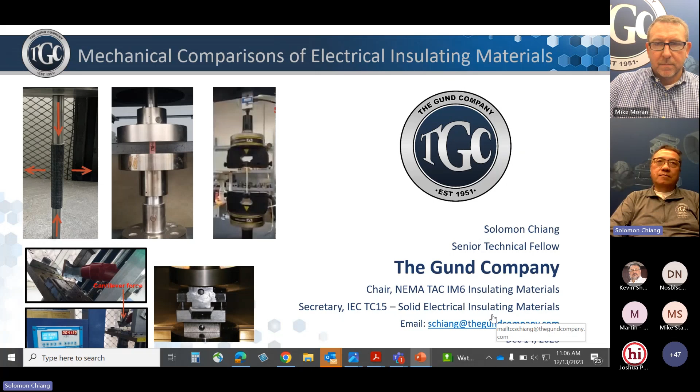Comparisons of electrical insulating material properties. So why do we want to compare material properties? There are many good reasons, and the first one is material alternative.

In the last two or three years, we always run into material supply chain issues. From time to time, the purchasing department would say that they cannot get material A in time, or either the lead time is too long or the material is no longer available. So they want to substitute material B with the incumbent material A. Obviously, we want to make sure that this would not affect our product or components.

Sometimes purchasing comes to us and says that for purchase productivity or cost reduction, they want us to look at this material, so we will do the same thing. Sometimes the customer wants to, or we ourselves want to improve the properties of certain components. So again, we would need to compare the properties of the incumbent material to the candidate material we want to replace it with or add as an alternative.

So those are all good reasons for comparing material properties. In order for us to compare material properties, we obviously need to know the material standard and the test standard and the relationship. Besides looking at a single number, we also like to look at what we call the graphical test data, the stress to strain curve. I will elaborate on this later on, but this is essentially the behavior of the material under stress, and that's very important for mechanical properties.

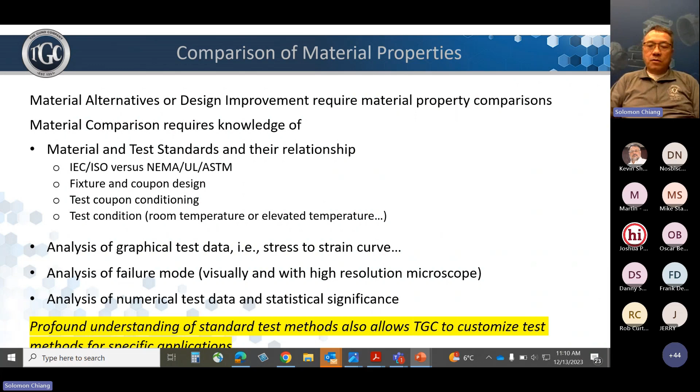On top of that, after we have compared the material properties, we may want to use the candidate material and make some actual components or even finished product. At that point, we are talking about application testing, testing incumbent design versus candidate design, and we need special test methods. Without a good understanding of the material and test standards of the material, we would not be able to come up with a test method that's valid and meaningful. So those are all the reasons why we want to compare material properties.

This webinar will be focused on mechanical properties of electrical insulating materials. The reason why is because mechanical properties for electrical insulation is as important as the electrical properties of the insulation, and sometimes even more important. And it plays a very important role in successful product design, safety, performance, and reliability.

These are the three takeaways I hope we can take with this webinar: to have a better understanding of mechanical test standards for electrical insulating materials and how to avoid improper comparison. We want to compare apple to apple, not apple to orange, to get the results or the conclusion that we need. After that, we want to learn how to customize a non-standard test method. Non-standard test method is what I talk about, application testing, that is specific to the product or the application.

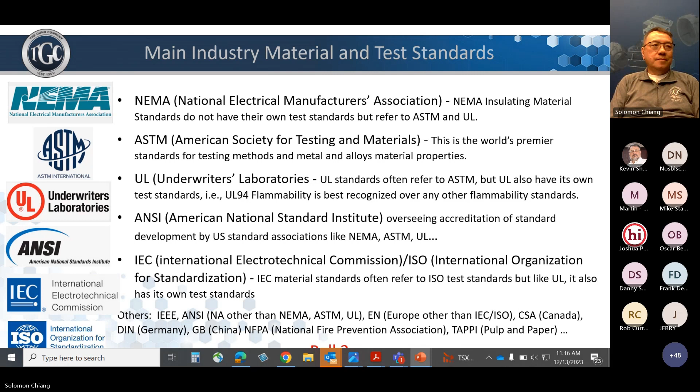Background. You can select more than one standard on that poll, I believe. Oh, no, you can't.

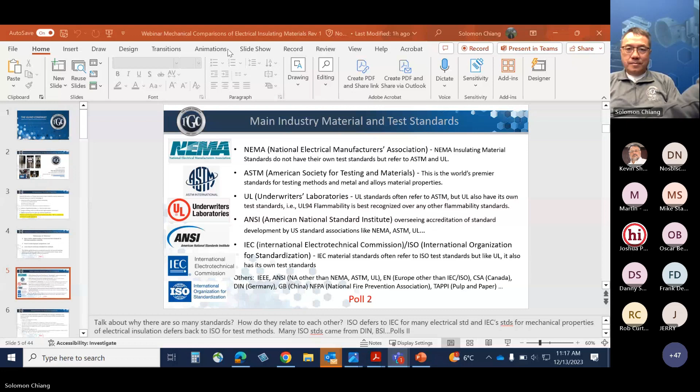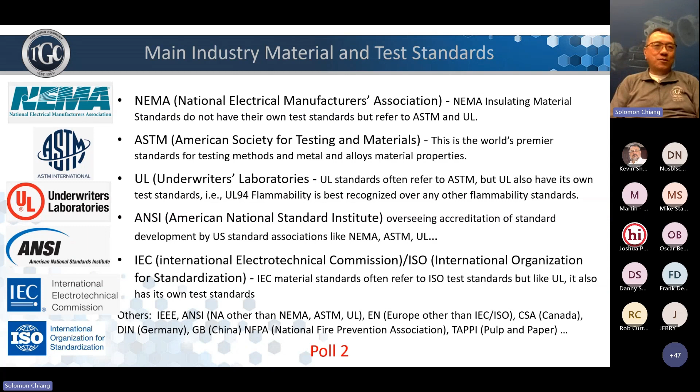It's gone? Okay. Thank you. Okay, thank you, Josh. Looks cleaner now.

So looks like many of us, especially UL, we all know about UL and NEMA. Yes, as expected, IEC is and ISO, because the audience obviously is North American based, but there are enough of us who work with international standards. That's a good thing, because I'm going to talk about the difference between IEC and NEMA standard a bit later.

So these are the requirements for a good test method or good test standard. Essentially, a good test method, and I would say ASTM is very good at all this.

The standard test method must provide meaningful results for use and be repeatable intra-laboratory and inter-laboratory. That means if you have the same set of samples and test it 2 or 3 times, it should provide consistency, the same result within a couple of percent by the same laboratory. And if you send that material to a different lab, if they follow a good test method, the result should be similar, again within a few percent. Actually, ASTM tells you the inter and intra-laboratory uncertainty for each test method. That's why I said ASTM is a very good test method.

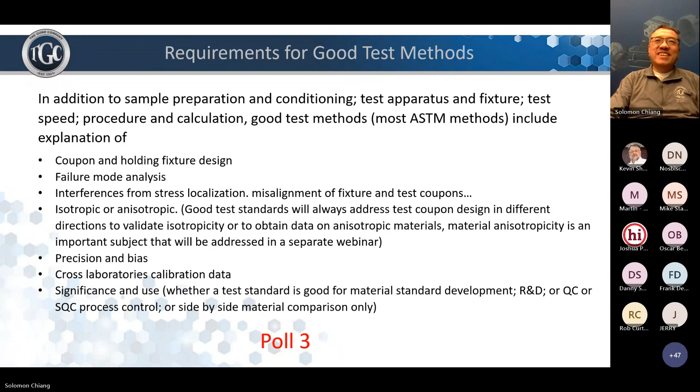Okay. Great news, I'm talking to experts, so I better be careful. So most of you, obviously, based on the response, have seen it.

This is the NEMA LI1 or IM 60,000, section 22, and that's the NEMA G11, and that's the performance requirement table. That's a very important table. First, it'll tell you what is the test standard, and then it'll tell you what conditions the test coupon has been exposed to. For high temp material, which is G11, a high temp glass epoxy grade, it will tell you what's expected at what they call elevated temperature property - that's to test at 150 degrees. It also shows you the properties for different material thickness. As you can see, some properties are thickness dependent, some are not, but NEMA shows it all in one table.

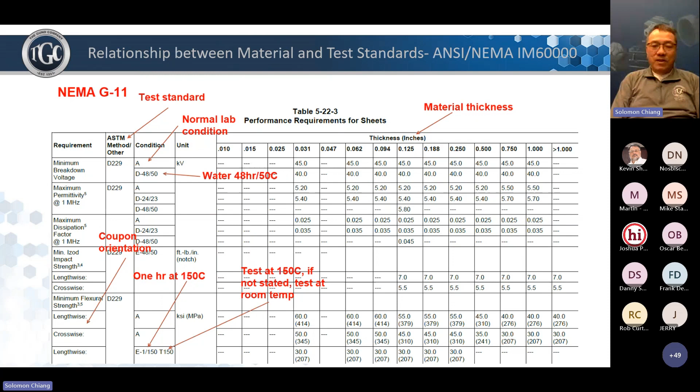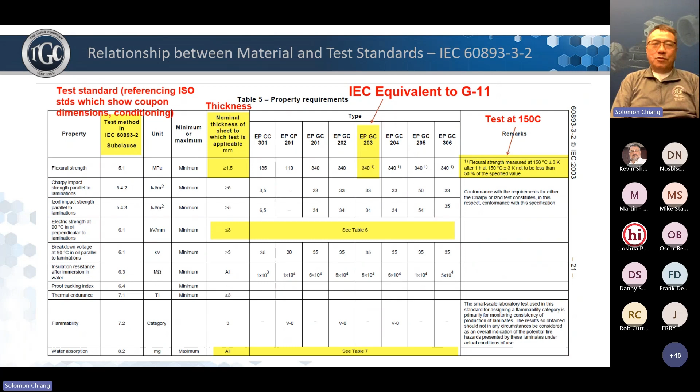So this is essentially a quick comparison between the NEMA standard and the IEC standard on material properties. I know I'm a bit biased, but I think the NEMA one is easier to understand, whereas with IEC you have to flip back and forth through different documents.

One thing we did with NEMA IM 60,000 is provide SI units on all the properties. And we went through an exercise and actually compared the NEMA properties to IEC properties. As far as the actual value is concerned, they are within a couple of percentage points, so they are in agreement, and most of them can be converted readily. Not all of them though - like water absorption, NEMA and IEC use different philosophies on how they want to express water absorption. The same goes for impact.

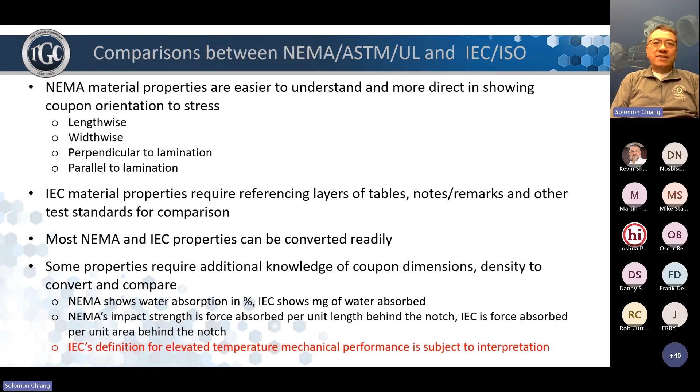The one beef that we have is the IEC definition for elevated temperature mechanical properties. As you can see here, with NEMA it's very clear - at room temperature it's 60,000 psi, and at elevated temperature it's 30,000, so roughly half. That's what IEC said too, but IEC put it in the remarks, and sometimes people can construe that instead of it being half of the requirement at room temperature, it should be half of the actual test value at room temperature. So material that outperforms at room temperature would end up having a higher bar to meet at elevated temperature.

For example, IEC EPGC 203 is 340 MPa at room temperature, so that means 170 at elevated temperature. But if your material tests out at 600 MPa at room temperature, some people may argue that it has to be at least 300 MPa at elevated temperature. That is not the intent of IEC.

The Gund Company actually holds a plenary meeting of IEC TC15, which is responsible for all this, and we talk about this at the next revision. We will add one more sentence to the remark, saying, for example, 340 at room temperature means 170 at elevated temperature. Examples like that clear up a lot of discussion or argument between purchaser and producer.

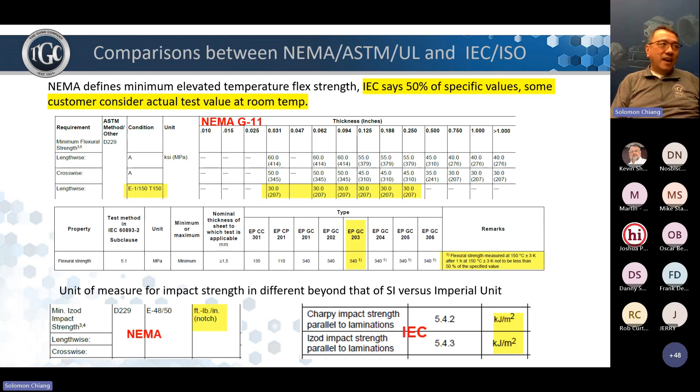Now, there are 5 main mechanical properties we will discuss in this webinar, and they are in this order. The reason why they are in this order is that 1, 2, and 3 are almost a requirement in the majority of the NEMA and IEC material standards.

Tensile is usually listed as a typical value, and shear again as a typical value. NEMA only lists punch shear. IEC lists both parallel shear, or ILSS, and punch shear as typical values.

For those of you who attended a previous seminar on electrical insulating material properties, we talked about the difference between requirements and typical values. In order for a material to be recognized as a NEMA grade or IEC grade, it must meet the requirement. All the properties must meet the requirement. A property that has a requirement is always shown as minimum or maximum, so you need to exceed the minimum or you cannot go beyond the maximum. Those are requirements — you must, or else it cannot be recognized as a NEMA or IEC grade.

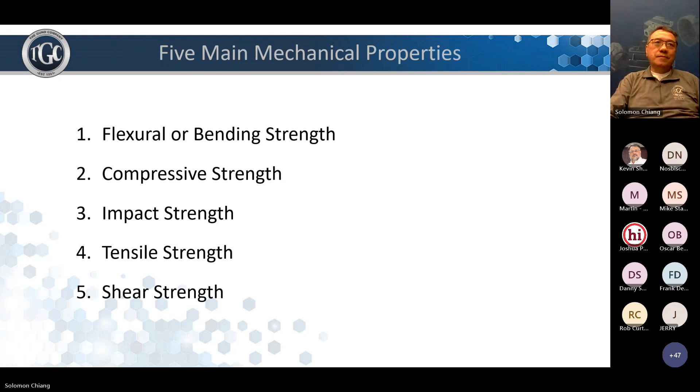Before we move on to talk about those 5 properties, I'd like to talk about universal testing machines. Based on the response, most of you are familiar with universal testing machines. They are universal because they can test everything I talked about before, except impact, plus a lot more. But they are universal in what they can test — they are not universal in the range. And as we all know, for insulating material, the mechanical property can vary by orders of magnitude.

Thin gauge material, flexible material — they are obviously not as strong as thermoset laminate. And heavier raw material is stronger than thin raw material. So at the Gund Company, we have universal testers as low as 1 to 1,000 pound maximum. Those are the ones we use for flexible materials, some thermoplastics, and paper.

Most composite material can be tested with a 20,000 pound, or 10-ton, universal tester. But when you get into heavy wall stuff, 1 inch wall and above, then obviously you need more poundage, or tonnage, like a 120,000 pound or 60-ton machine, in order to perform the testing to failure.

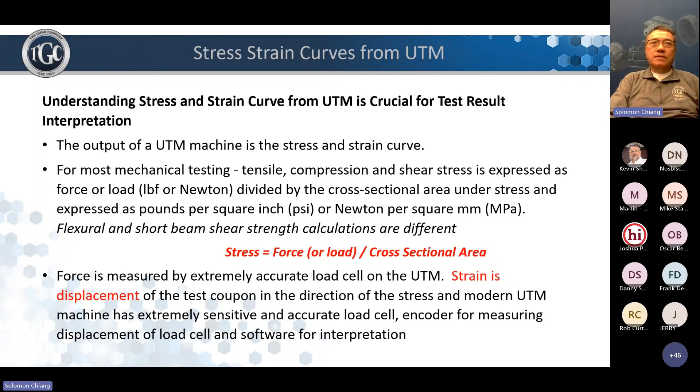This is a typical stress-to-strain curve obtained from a universal testing machine. This is a ductile material, probably copper or brass. As you can see, initially there's an elastic deformation region. This is linear, and also, once you let go of the stress, the material will go back to its original dimension. So this is the elastic deformation zone.

But it doesn't last forever. Once you exceed the yield point, the material starts to elongate without much increase in stress. It will strain harden, neck, and then fail, crack, or break apart into two pieces. The moment a fracture or failure occurs, there's a drastic drop in the stress or load, and the universal testing machine will stop right there. That's one very important parameter we can get from a UTM.

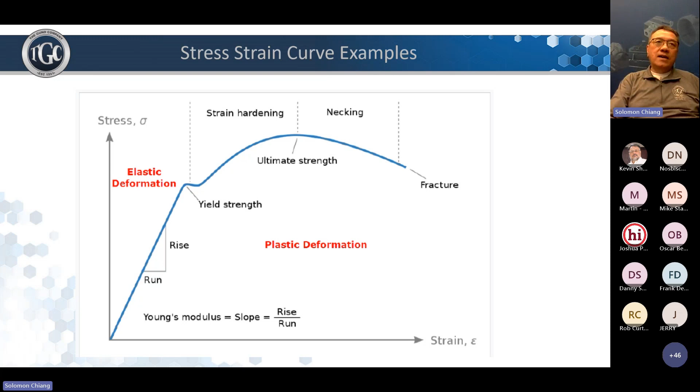It's the linear zone where the slope — essentially rise over run — is what we call the Young's modulus. Why is the Young's modulus important? Nowadays we all do finite analysis, and the Young's modulus is one number the finite analysis requires. Most of us are familiar that the Young's modulus is usually a very large number, like a GPa or Msi, and the reason is that it's divided by elongation, which is a small fraction.

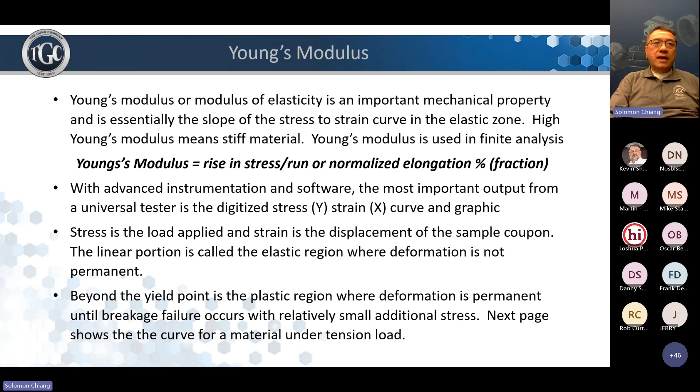The rest of them just repeat what I said about the elastic zone and plastic zone.

Now that we've learned about the universal test machine, we'd like to go into the 5 properties. The first one is flex, or bending, property testing. Flex is very important for both comparison and design.

If you have two material substitutions, if you do the flex test of material and compare A to B under the same condition, you already know a lot. The flex data can also be used in design work, like the finite element analysis we talked about.

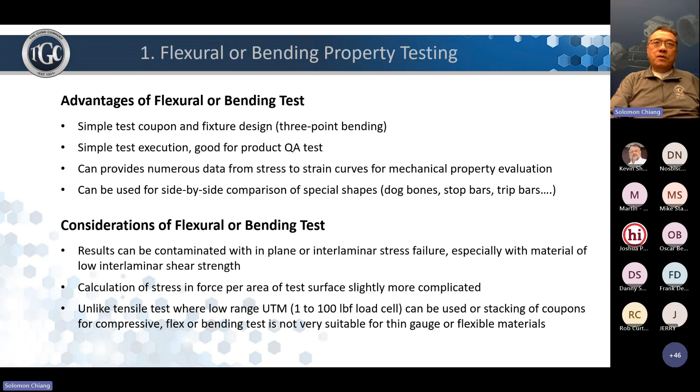Flex seems simple, but in order to do it correctly and get the right number and arrive at the right conclusion, there are certain things we need to watch out for.

The flex test is essentially a 3-point bend, sometimes called a 3-point bending test. The coupon or specimen is supported on both ends, and we apply a force in the middle.

This explains what happens when you press it down. At the bottom, there's tension - the material is being stretched. At the top, the material is being compressed. Ideally, in the middle, nothing happens because the material neither elongates nor is compressed.

The reason it doesn't count is because we don't have adequate span distance. ASTM and ISO call for a 16:1 span distance - 16 is the distance between the two blocks, and the 1 is the material thickness. If it's less than that, you could run into ILSS failure.

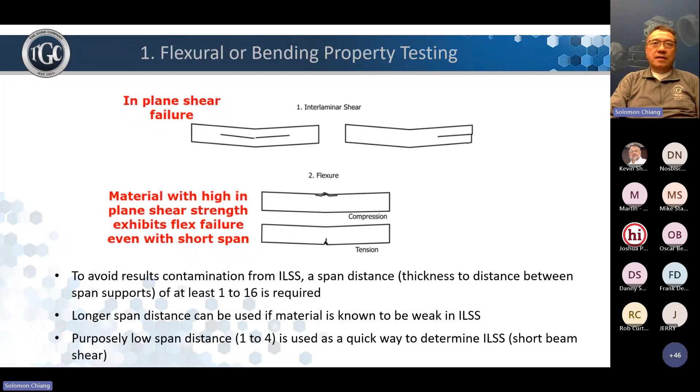For material with weak ILSS, sometimes you need to increase the span distance beyond 16:1 to get proper flex failure data. On a UTM, the flex test stress-to-strain curve would look like that.

For brittle material, because it fails at a distinct point, the universal testing machine (UTM) will pick up a fail point. For ductile material, because it doesn't fail the same way, ISO or IEC say to stop testing at 3.5% elongation, and ASTM says stop at 5%. In that zone, it really doesn't make a lot of difference whether it's 3.5% to 5%. Essentially, they just want a standard point to stop the testing.

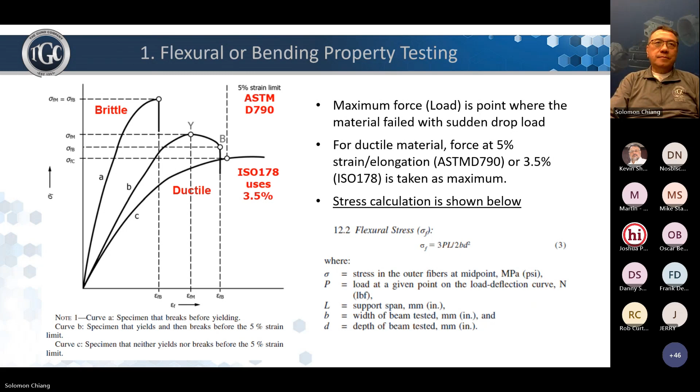The second important property is compressive strength. That's again very useful to compare material A to material B, and also useful for design work.

A ductile material, if you compress it, actually expands a little bit and looks like a barrel. There's a Poisson ratio that describes the displacement in the y direction relative to the compression in the x direction, but we won't cover that in this webinar. That is a very important number for finite element analysis also.

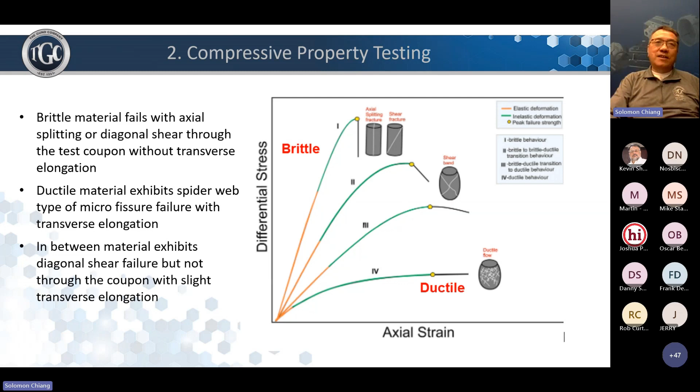The failure mode is not a vertical crack or diagonal crack - it's a lot of minute failures. So just by looking at the coupon after it failed, you can tell whether it's a ductile or brittle material.

This is a picture of how we conduct compressive testing. Again, very simple - as long as you follow the rules, the sample should be a prism, 1/2 inch by 1/2 inch by 1 inch in length. For tubes and rods, just follow the rule.

Again, when you compare the properties of material A to material B and it shows some compression difference, you have to make sure the properties were performed using the appropriate ASTM, IEC, or ISO method, so there's an apple-to-apple comparison.

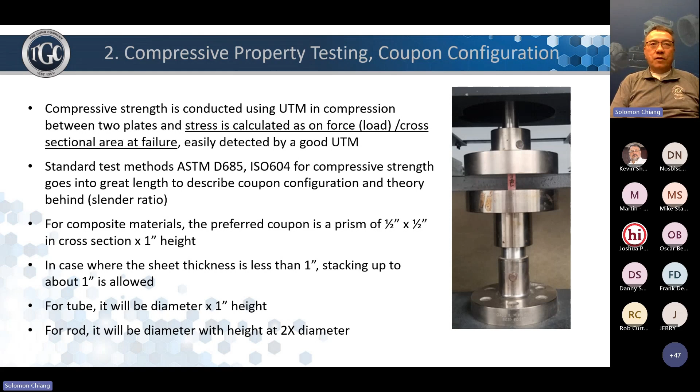Even though it looks simple, both ASTM and ISO methods require you to make sure the coupons are properly aligned. A good UTM is self-aligning. If the alignment is off, especially with tensile tests, you get bad results. And for compressive tests, you have to make sure the surface facing the platen is perfectly flat.

On the left-hand side, it shows a pultruded spacer. With pultrusion, that's always the top and bottom die, and in between is your parting line. Before you test it that way, you had to sand off the parting line so that you don't localize all your stress there, which gives you premature failure. Those results don't count.

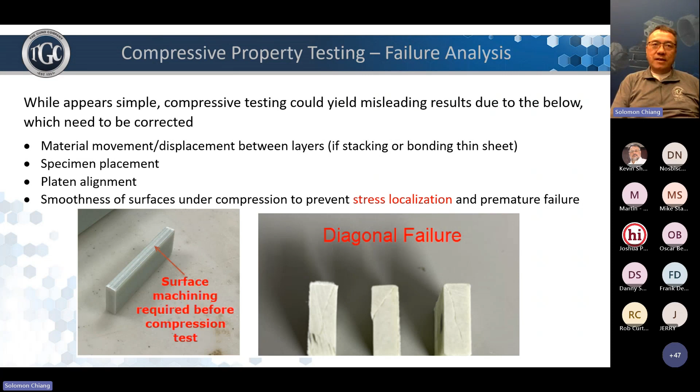Impact: most IEC or NEMA material standards show impact properties, and in most cases those are not very high bar. I have not seen thermoset composite having trouble passing impact property, but it's there, and it's good for comparing material A to material B as far as whether one is higher than the other.

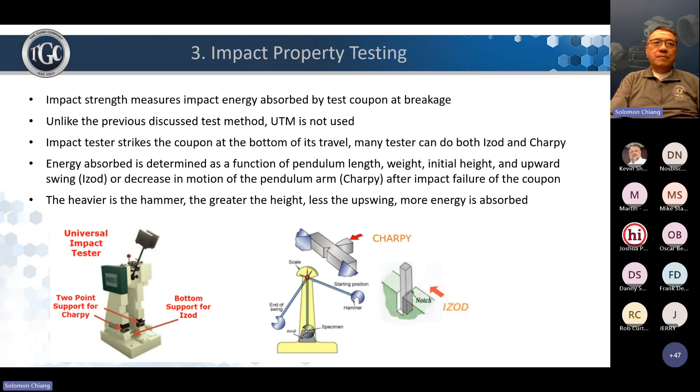It's not very useful for design work, but it's a good comparison between materials, and they are not done by the universal test machine. They have special tests - essentially you swing a pendulum against a coupon and see how much energy the coupon can absorb before it breaks. With UTM, we can look at the stress to strain curve and see if the material is ductile or brittle. In this case we don't have the UTM, but we can always look at the sample after it failed.

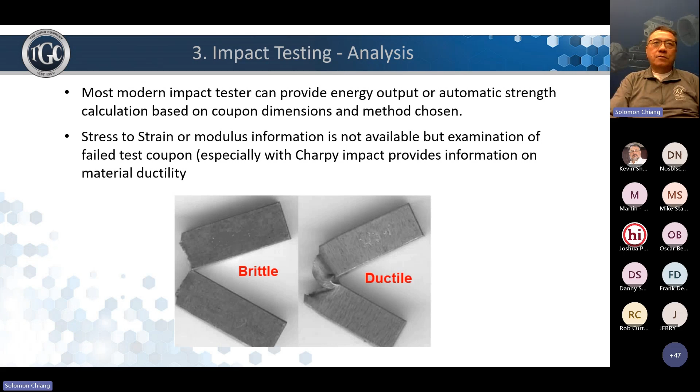I think one of the reasons why NEMA or IEC do not put tensile properties into their spec as a requirement is that this is one property a design engineer tries to avoid as far as the insulating material is concerned, because rigid thermoset laminate, the insulating material used for mechanical support, is always stronger with flex and compressive strength than with tensile. So most design engineers will want to make sure the insulating material is not under tensile stress. So this property is obviously very important for design work.

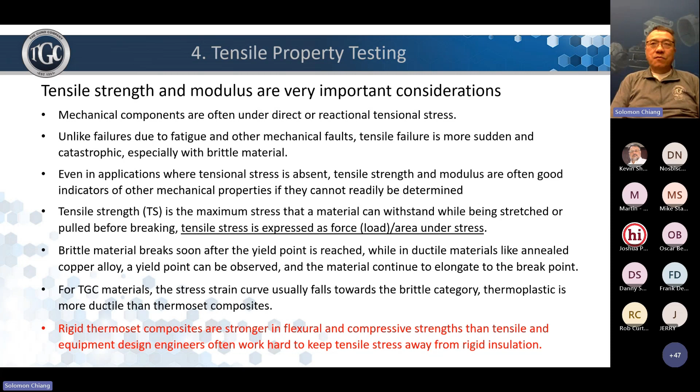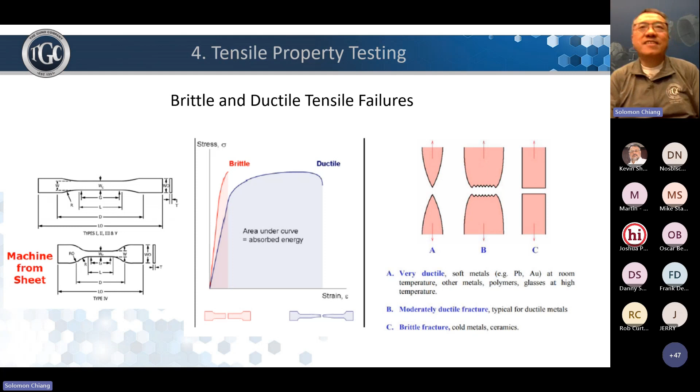The last one is not as popular as the other four, but it's important for design work, not just product design but also manufacturing method. Say if we are punching some heavy gauge thermoset laminate, then we better make sure our press has enough tonnage to do the job, and that we can use what we call the punch shear strength.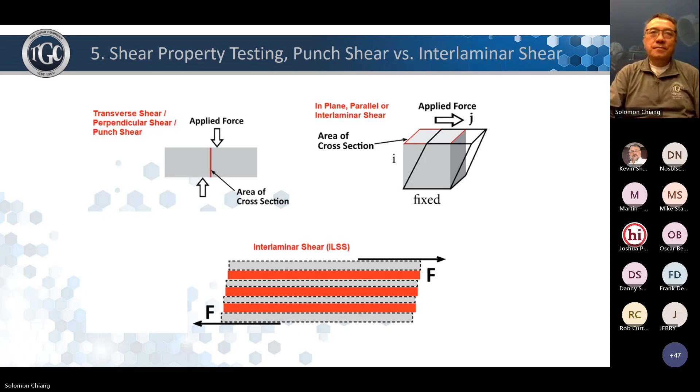ILSS, or in-plane or parallel shear or interlaminar shear, is different than punch shear because it is in the same direction as the lamination. Essentially, it is the force holding thermoset laminate layers together. It is important, as I have a good example later on.

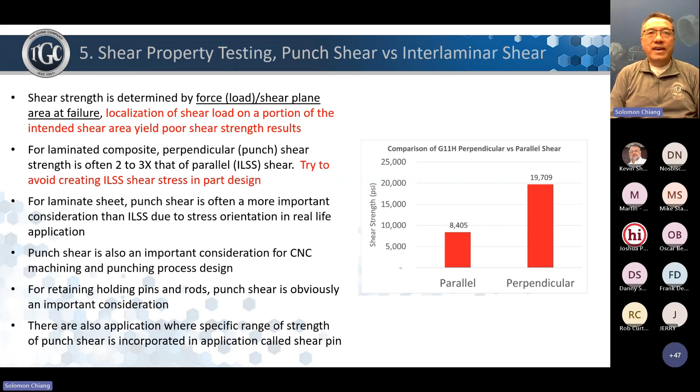One thing to remember is that ILSS is usually 2 to 3 times weaker than the punch shear strength for thermoset laminate, and that is a very important consideration for product design. If possible, we try to avoid our components being under ILSS, because in a way that's the weakest part of the thermoset laminate.

ILSS can be obtained using the ASTM method plus the IEC method, or even customized test methods, but most of them require special fixtures.

There's also a quick way to do ILSS. It's essentially a 3-point flex test, but you reduce your span distance to something like 4:1, and you essentially force the coupon to fail in the ILSS manner. So for screening tests, if you want to compare A to B and don't want to go into the more elaborate ILSS, you can use the 3-point bending.

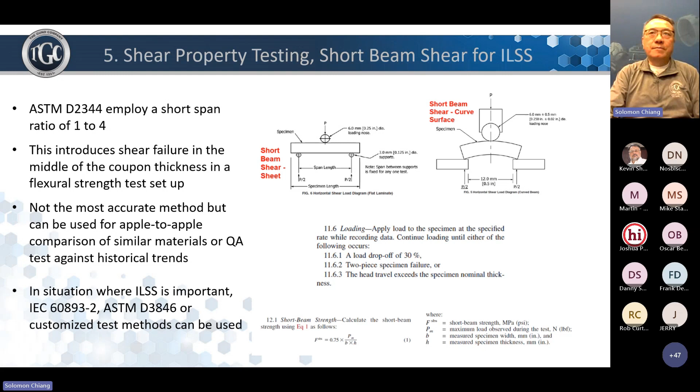One thing why ILSS is the weakest part of thermoset composite is because it is influenced by the bonding of the resin to the fiber. So if the fiber has void and porosity in it, you can see that it will be weak on the ILSS.

Now, in summary, we talked about mechanical property comparison. The conclusion is that materials standards should always reference a test standard. If you see a technical data sheet giving you all kinds of numbers without any test standard, it doesn't mean anything.

We also talked about US and international standards. One thing I'd like to highlight, nowadays with Minitab being available, in addition to just looking at one number against the other, we should also apply some statistics to it, especially when comparing properties, because the statistics would be impartial, telling us whether A is as good as B, or B is worse than A, or B is better than A.

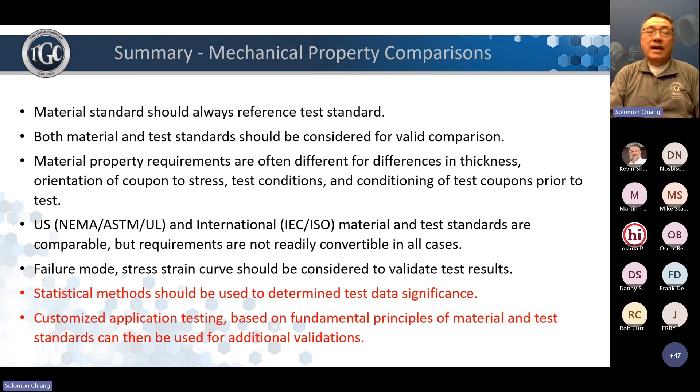When we compare materials, as I mentioned before, after all the material property comparison, if we are still in doubt whether substitution can be used, then we are talking about customized application testing. I have a few examples at the back. And if you want us to help you with customized application testing, just talk to our sales engineer or account manager, and we can help you out.

That is just a statistic from Minitab. For example, in a material substitution situation, not only do we compare the properties of the candidate to the historical result of the incumbent, we also test the incumbent and the candidate side by side, using the same aging, the same conditioning method, and the same test method. Then once we have all those results, we can apply statistics and ANOVA testing to see if we are indeed seeing a difference or if it's just natural variation.

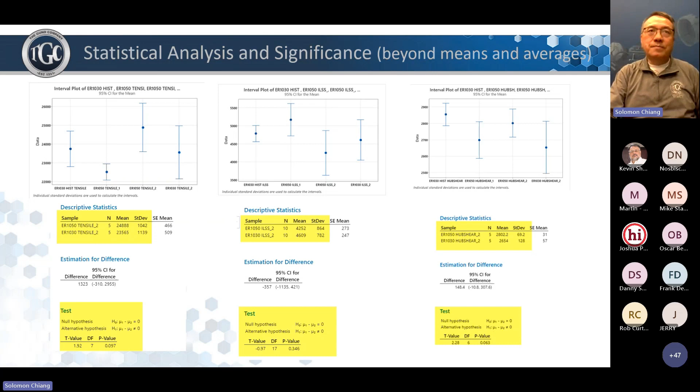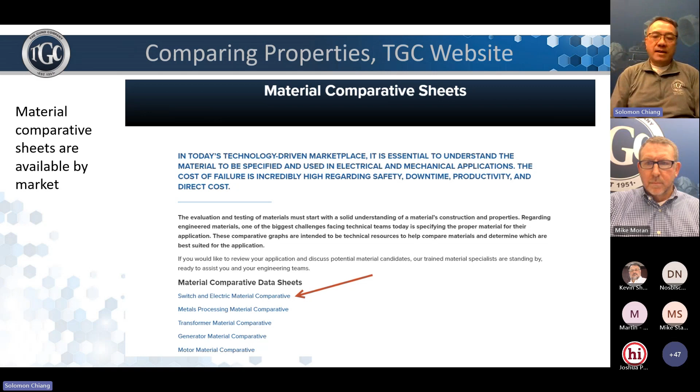And then we divide it up by market. We have 5 different markets, so pick the market you choose, and then you can see the material comparison by NEMA grade equivalent, IEC grade, what's the generic name, and every property that you want to know.

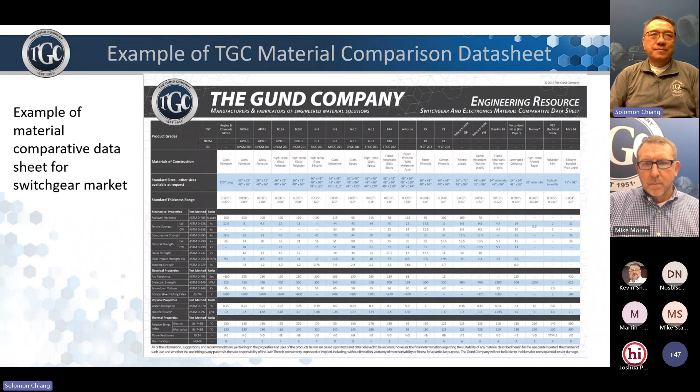Okay, so to conclude the seminar, I have 5 slides about special application testing. The first one is our standoff insulator, and this is what we call cantilever testing. As we all know, these standoff insulators are used to support bus bars, and during short circuit, the bus bar will have a tendency to move, so we want to make sure they have enough cantilever strength to prevent the bus bar from moving in case of a short circuit.

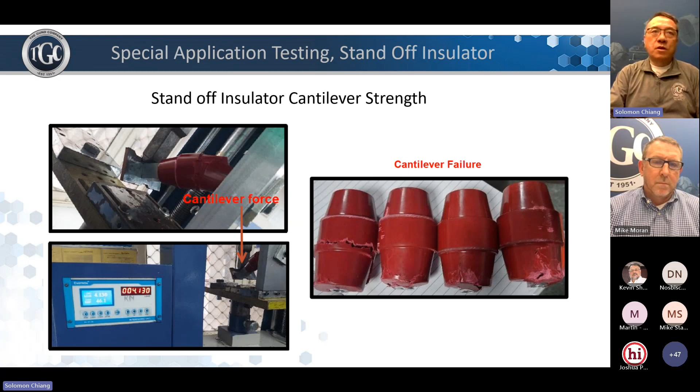It's a safety test. The second one, again, is a safety test. This is a fuse strip holder. What we did is when the fuse strip trips, during the overcurrent situation, the fuse link will fail, and then there will be a plasma. We want the fuse strip holder to be strong enough to hold the plasma, and that's why we apply this test. This test essentially turns the compressive force on a very highly viscous liquid into a bursting force, and depending on the type of fuse, there are requirements we need to meet so we know the fuse can withhold the plasma plume in a failure situation for safety.

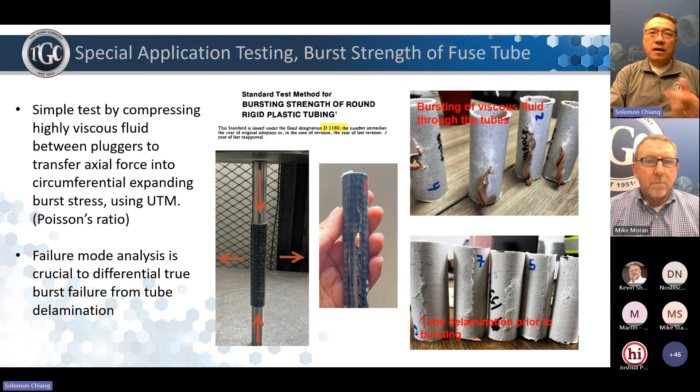This test also detects delamination. So if the filament wound tube or fiber wound tube used in the fuse strip holder was not made properly, it will fail in delamination before actual burst failure. That's an example of failure mode testing being useful.

Won't go into this one too much. This is the dog bone specimen.

We call it a transformer spacer. What it does is that it provides support during the winding. And more importantly, in application, it provides a channel for natural convection, so cooling. That's why it's a dog bone shape, to provide an additional cooling channel.

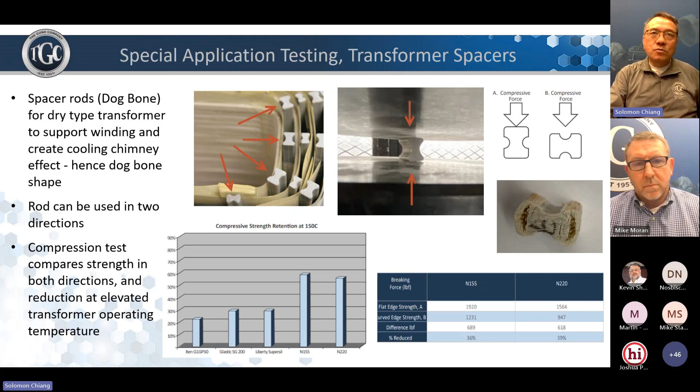Some customers apply it one way, flat. Some customers apply it the other way, in direction A, and some customers use it in direction B. The customer wants to know how much compromise direction B has in terms of compressive strength, so we test it for the customer using a non-standard compressive test setup.

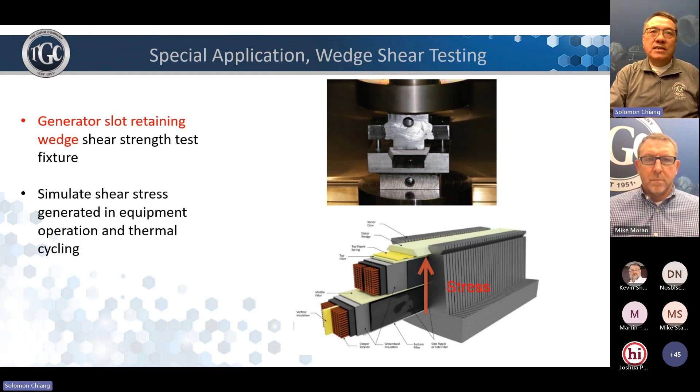This is what we call slot wedges. It's used in generators and large motor stators. Essentially, it keeps the winding underneath in place. In a generator or large motor, there's vibration, and also the on-off cycle that produces a lot of thermal stress. So the coil, the winding, wants to pop out, and the wedge holds it in place. Obviously it serves a very important function, so we want to make sure it has the proper shear stress, and that's our special testing devices.

This one could be interesting. We talk about ILSS, interlaminar shear strength, and how important it is in application. Top left-hand side is a thermoset laminate. If we want to drill a hole in it, and if you drill a blind hole, you can actually introduce ILSS. If you want to drill a hole, drill a through hole so you don't introduce ILSS. Also drill it perpendicular, don't drill it sideways or parallel.

You can imagine if your drill is dull and too large, you will split the material right there. Even if you are successful and have a thick material, and you manage to drill a hole in it, and then use it to hold the bus bar, it does not have the strength to prevent the bus bar from moving during a short circuit failure. And that is a problem.

That's the opposite problem, and that's the actual example. The solution was very simple: just change the direction of how you machine that spacer and bus bar holder. Same applies for tubing - drill it through.

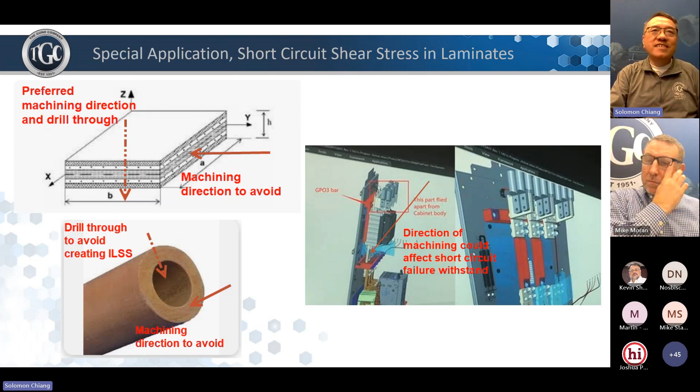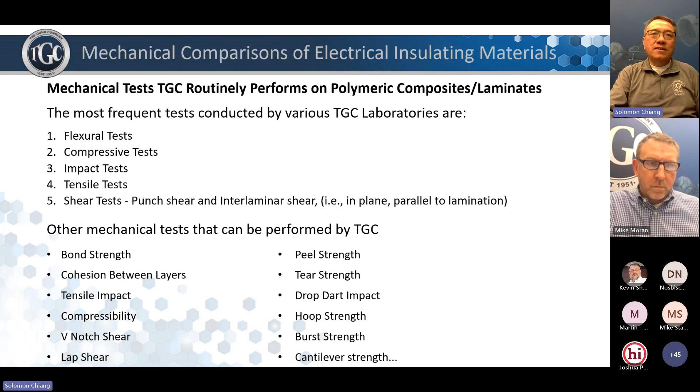And TGC, we are capable of performing all these tests plus other mechanical tests. So again, if you need us, just talk to our sales engineer or account manager, and we can even custom design some end product testing if you want to go beyond just mechanical testing for comparison purposes.

Okay, sorry for the interruption at the beginning. I think I managed to finish in 5 minutes. Yeah, no problem, thank you Solomon.

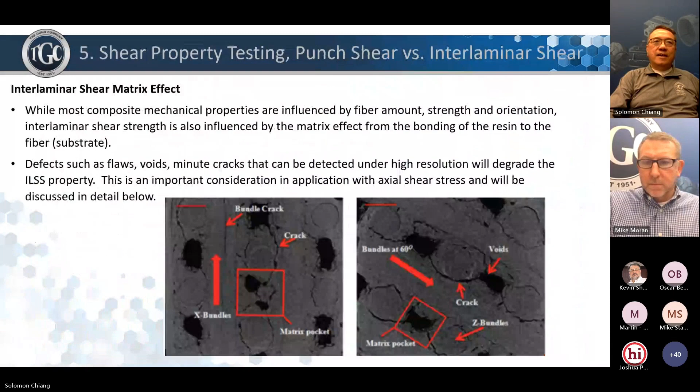Jim had asked, can TGC test tear strength of papers? Jim is apparently working with some papers, so he wanted to know if we can test tear strength. Definitely, it can. Our low-range universal testing machine goes down to 1 pound, and a lot of tear strength tests are in the 10 or 20 pound range, so we can do it with a very high degree of accuracy.

Yeah, and there's a couple different test methods for tear strength, I think. If I remember right, TAPPI is one of them. Yeah, there's some different test methods there, so you may have to decide on the right test method, but we have the fixture to cut out the coupon to the different test requirements.